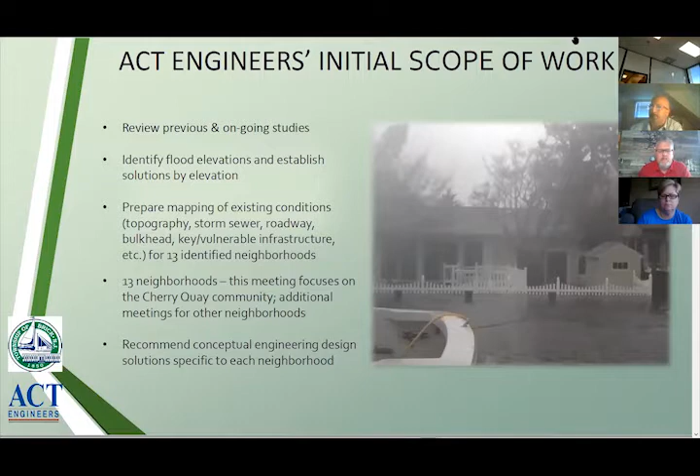And as you know, tonight we're focusing on the Cherry Quay area of the township. So on this next slide, on the left-hand side is the list of the 13 study areas that we have been focusing on. And on the right-hand side is a picture, you will see the areas specifically identified for the study. And now I'm going to turn it over to Jeff.

And as was indicated early on, Jeff is going to be giving you a lot of information, a lot of statistics. And if you have a question, don't hesitate to interrupt him and ask him because he's really good at explanations. So Jeff, it's your turn.

Thanks, Carol. As Carol indicated, this slide shows the 13 study areas listed on the left-hand side of the slide. You'll notice the Cherry Quay is number 5. On the right-hand side, you'll see an aerial map of Brick Township with the study areas highlighted in yellow with a blue number next to it. So you can find Cherry Quay is over to the center left. You'll see Cherry Quay outlined in yellow there.

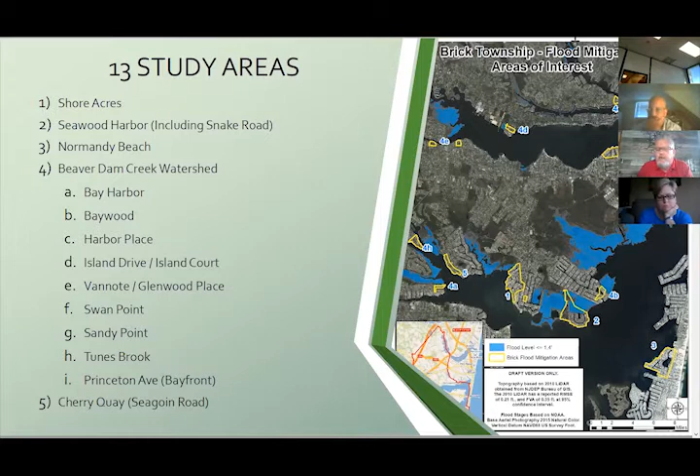The blue areas represent the low-lying areas that are inundated with flood waters even during a minor flood event. Let's go to the next slide. This slide is 2 representations of the Mantoloking tide gauge. They're both taken from the same tide gauge.

The reason we wanted to show this is that there's 2 sources of information that neighbors and engineers look up data for flooding or for the tides in the Barnegat Bay and in Brick Township. One is the Stevens Institute of Technology, which is on the left, and the one on the right is from the National Weather Service. Now, this is important. Another reason we have this is I want to explain the datum, which is the vertical datum that's used by the Stevens Institute. You'll see it references NAVD 88.

That datum means the vertical datum that's used to establish elevations. Now, NAVD 88 is the datum that we're going to be using in the slides that follow. Everything we reference as far as elevation is going to be referred to NAVD 88. Now, the reason NAVD 88 is important is because that's the survey datum that surveyors use to collect topographic information. They use that datum when they're staking out improvements, whether it be roads, homes, storm sewer systems, etc.

Everything nowadays is referenced to NAVD 88 datum so that everything is consistent. So that's the datum that we're going to be using going forward. You'll notice on the National Weather Service that there's a difference of 0.4 feet. So you've got to be careful when you look up the floods or the tidal ranges to see what datum you're on. If you're using the Weather Service datum, you need to subtract 0.4 to get to the NAVD 88. Okay, next slide.

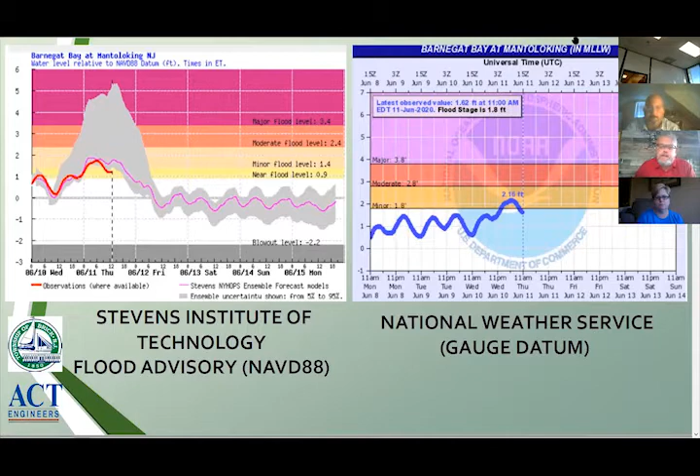This slide is a graphic representation that shows the various tide elevations in Barnegat. You'll notice the mean high water elevation, MHW, is 1.09 feet, and the mean higher high water elevation is 1.33 feet. That's represented by the MHHW. For Cherry Quay, the red line represents the lowest road elevation, which is located at one of the storm sewer structures along the roadway. So you'll notice that the lowest elevation is 1.82.

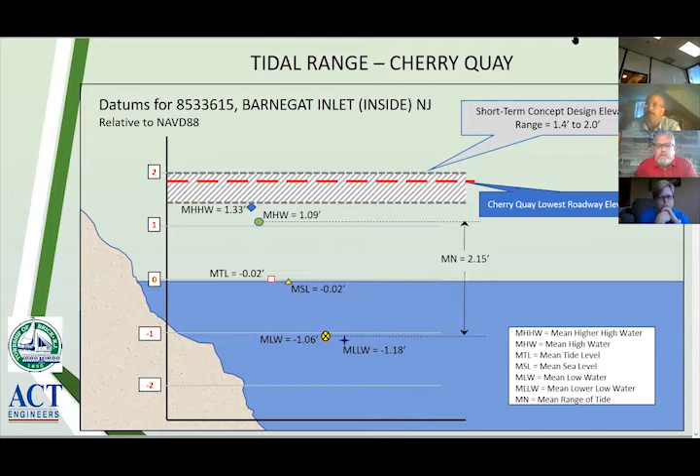And for this conceptual design for all 13 communities, we're looking at a conceptual design of between 1.4 to 2.0 as our target elevation. So you can see that getting to 2.0 from 1.8 is not very difficult. It doesn't create as many challenges as some of the other neighborhoods do. Okay, let's go to the next slide.

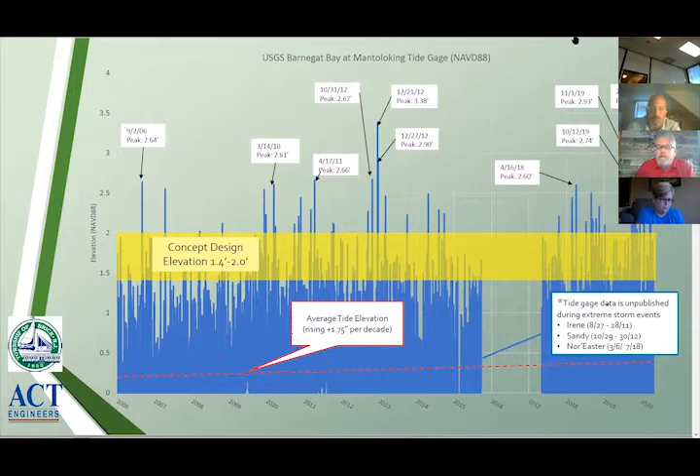Okay, this slide is again the Mantoloking tide gauge. And again, the elevations are on NAVD 88. Along the bottom is the years, and you'll see that it runs from 2006 to 2020. There is a gap in the data from the end of 2015 to the beginning or mid 2017. During this time, the gauge was not operational and data was not being put forward from the USGS. Up the left-hand side is the elevations. You can see it runs from 0 up to 4.

And all the blue up and downs represent the fluctuation in the tide. Obviously, the high tides are as it goes up, and then it comes down to the low tides. The low tides, in most cases, are below the 0 line, but that's less of a concern than the high tides. And you can see our concept design elevation of 1.4 to 2 is the yellow band that goes across the slide.

And why this is important is because you'll notice that the majority of the high tides are occurring below the elevation 2.0. There are several instances where you'll note that the tide did peak higher than that. In fact, on the center of the page at the top, 12/21/12, it peaked at 3.38, which is almost 3.4, which I'll explain what that means later.

But you can see that there's very few instances over the course of that time where the tide peaks higher than that. Now, I will note that this tide gauge information does not include severe storms like Superstorm Sandy or any of the hurricanes. The data that's collected during those events is not reliable because it exceeds the range of the gauge. So the USGS does not post that data in the tide gauge records here.

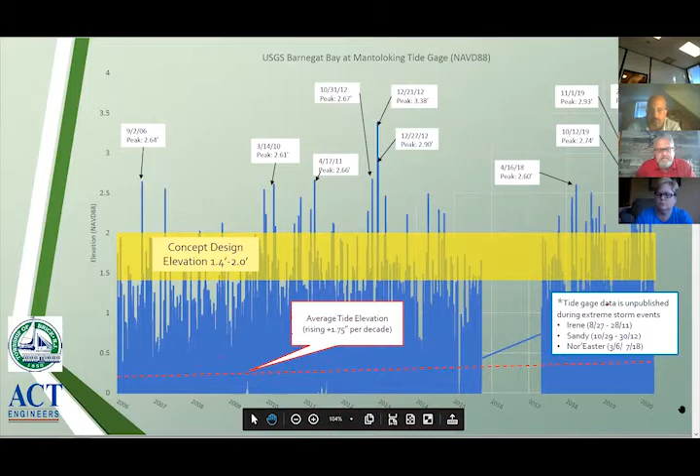Okay, the next slide. Janetta? Okay.

And this slide, we're showing the community flooding impact assessment. Now, the thing we looked at here, you'll notice on both charts, on the right-hand side of the chart, there's numbers. And at the head of that column, it says number of dwellings with compromised access. So you say, what is compromised access? We considered compromised access to be if the properties had frontage on flooded roads or needed to travel through a flooded section of road to get out. So if you lived in an upland area that doesn't flood, but there's only one road out for you to get out of the area that's flooded, then you're considered compromised access.

So the chart on the left was our short-term design approaches. And this was properties that were impacted to less than or equal to a 2 foot flood elevation. And you'll see that Cherry Quay has 2 dwellings with compromised access when the tidal waters get to an elevation of 2. On the right-hand side is our impacted greater than 2 foot to 3.4 flood elevation. And you'll see the 3.4 flood elevation map in just a little bit. But this represents the long-term design approaches. And in this, Cherry Quay has 23 dwellings with compromised access during that particular flooding event.

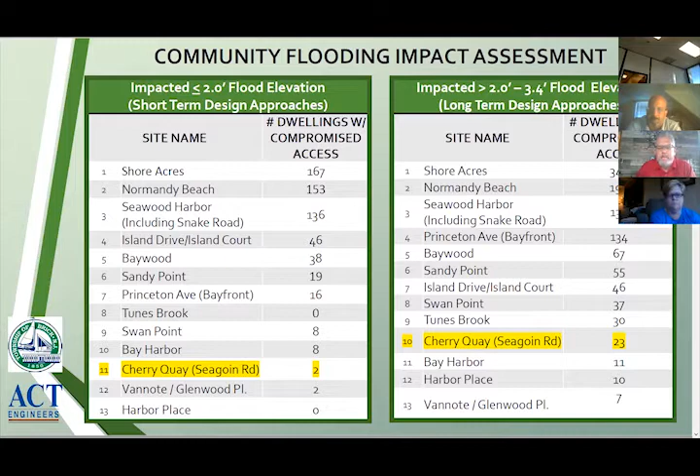Okay, next slide. Okay, this slide shows an aerial view of the Cherry Quay area. You'll notice a little bit of blue up at the top left and spattered throughout the area. The blue represents a flood elevation of 2.0. And if you remember, that goes back to the yellow band. The top elevation of that yellow band was an elevation of 2.

The orange reddish areas are inlet structures and outfalls to the bay area. And the numbers represent the elevation at the inlet castings, the inlet structures. So you can see a lot of them are above 2. You've got the one at 1.88, but you've got some in the 2s and 3s and all the way up to 5 when you get up towards Starboard Road. Okay, next slide.

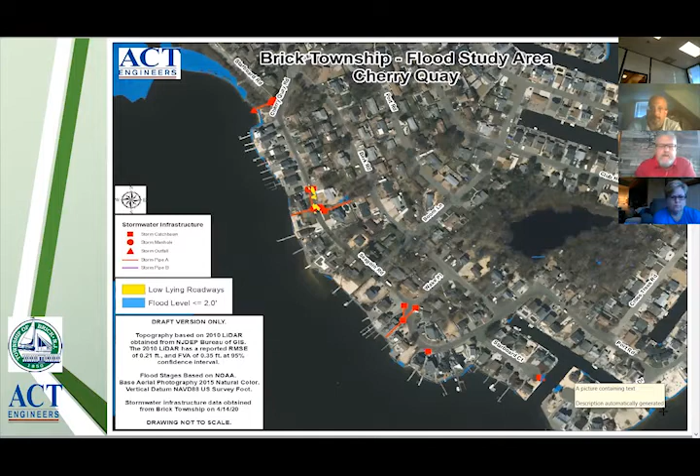Now this slide shows basically the same thing. The only difference is the yellow represents the low-lying roadways that would be below an elevation of 2. Now this is based on current available LiDAR data, which is topographic information. It's from an aerial. So those are the low-lying areas that would collect water at an elevation of 2.0. Okay, next slide.

Going back to when I mentioned the 3.4, that we would come back to that elevation. The blue now represents the inundation that would occur at a 3.4 foot flood event. And as you can see, there are significantly more roadways and properties that are impacted during this type of an event, though this event occurs on a less frequent basis. Okay, next slide.

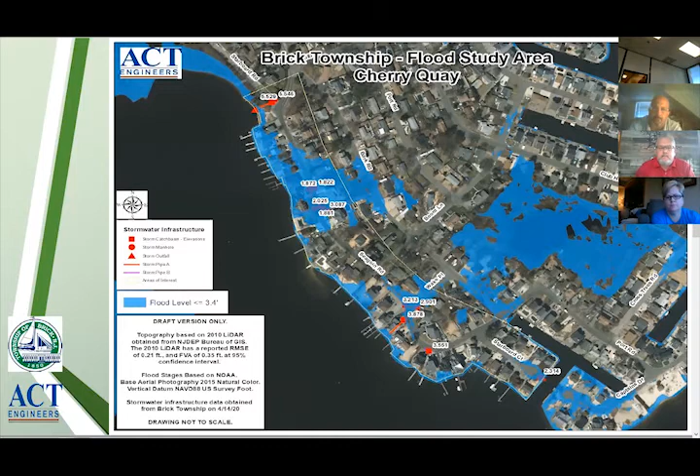And based on tide gauge information, this flooding occurs 60 plus or minus hours per year, which is significantly less than the short term. To address these types of flooding events, it would require, again, the installation of check valves, potential raising of roads, driveways, and properties to blend into the new roadway elevation, raising of bulkheads, and potentially pump stations, depending upon the total amount, which would really depend on the final design of the solution for long-term mitigation.

Now, the orange would be the elevated roadway, curbing, sidewalk, and property grading. And you can see how in concept you're able to get less water in the gutter and potentially eliminate all the water altogether. What this type of mitigation does is it improves vehicular access during normal tide events so that you can get in and out of your property to safe ground if necessary. This solution may require driveways, sidewalks, and yard improvements to blend the property into the new roadway elevation.

There are also stormwater impacts and mitigation, which would have to be addressed during final design based upon more exacting data for the neighborhoods that are being designed. And these solutions would need buy-in from the neighborhood, because there would be potential work on private properties to blend the grades so that water doesn't get backed up onto the properties and is able to flow to the street and the storm sewer system.

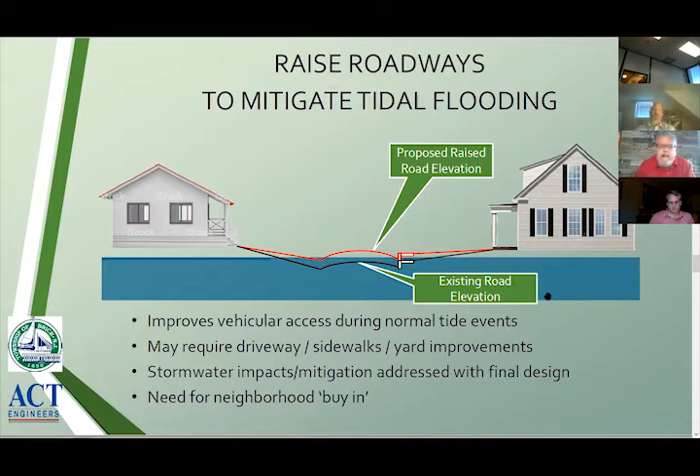Okay, next slide. This slide shows graphic representations of what raising the roads might look like. So on the left, the red line would indicate the raising of the road. The top of the arch would be the new road elevation, and the bottom flat red line would be your existing road grade.

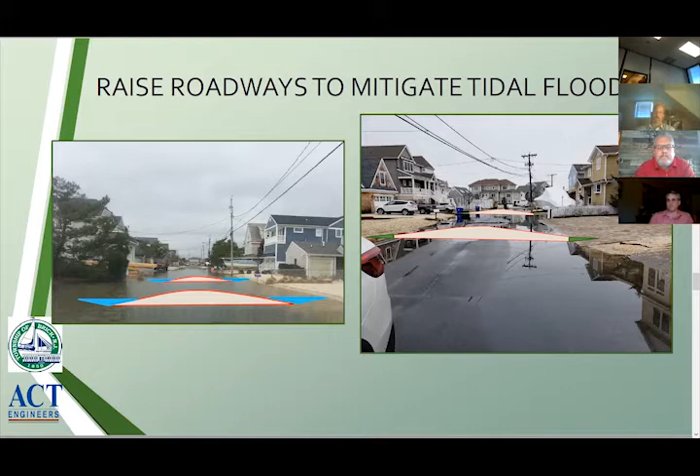The check valve will let the flow go back into the bay side. However, when the tide starts to rise again, the valve's going to shut. Whatever water's in the system is going to stay in the system until the tide goes back down, or the waters on the upstream side have a higher height, if you will, than the bay, so that it can force the water back out into the bay.

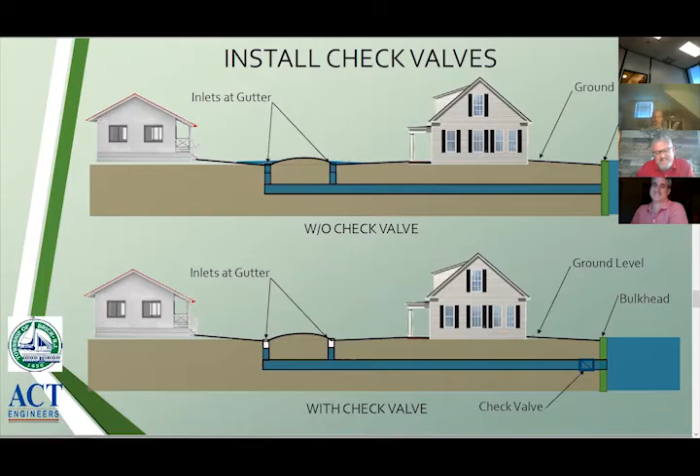Okay, next slide. Sorry, Jeff, you're freezing up every time you say next slide. Okay. And there's a little bit of a delay. All right, that's all right. Sorry. No problem.

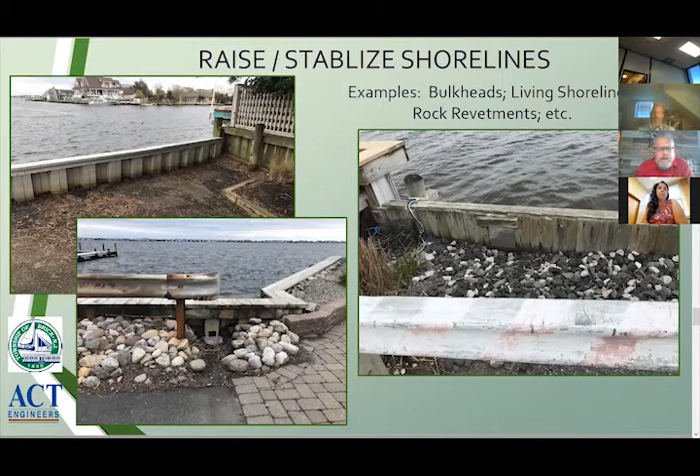Okay, back to Carol. Thank you, Jeff. So next steps moving forward, we're going to be updating the topographic mapping in specific areas as we move towards the engineering design, where the township and ACT will continue to identify and pursue funding sources such as those from the United States Army Corps of Engineers, FEMA, New Jersey Office of Emergency Management, NJDOT and their local aid programs, as well as other potential funding sources.

And we're going to work with the township to identify and recommend revisions for future design standards for township ordinances, and work with Brick Township in developing strategies, allocating funding, and moving to implement, which leads to final design, obtaining the necessary permits, and then going on to construction to relieve the flooding in the areas designated. So that's really all that we have now before questions.

And I want to apologize because when I talk, my mouth actually does move. So I'm going to give it back to you, Joanne, for questions and discussion. Well, I think the mayor wants to give an update to the residents on the call too. Great.

Yeah, so from a township perspective, who's here is Joanne Bergens, our business administrator. Our township engineer is here as well, Alyssa Cummins, and two of our councilmen, Councilman Art Halloran and Councilman Vince Minichino, are all here. So if you have questions for the township, hopefully one of us can answer those, or for ACT engineers who just gave the presentation, you can ask those questions as well. But just to give you an update as far as funding for things like this, we have been funding along the way, including recently.

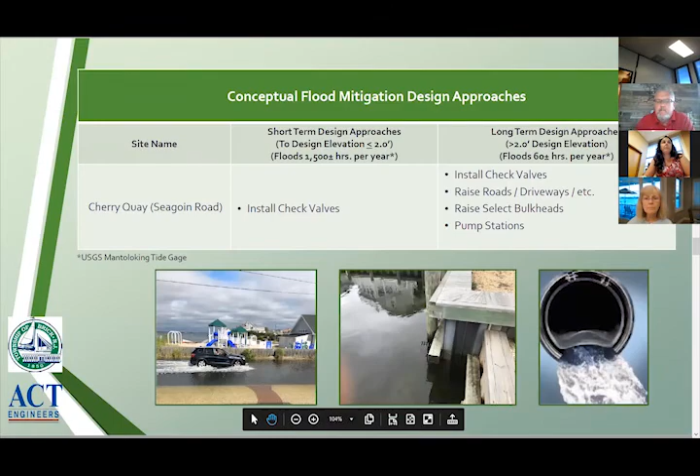There's other neighborhoods. Can you put that map up which shows Seagoin Road on the yellow and the red and all that? Janetta, can you do that for us? Yeah, she's getting it. The one with the yellow, Jeanette? Next one. There you go. Oh, thank you for that. So I had the one on before because it has the elevations. Okay. Why don't you click back to that one real quick?

So you can see where the yellow is, and then you can see the elevations there. You got 1.87 and a 1.88 and a 1.82. So that area is under 2. Thank you. I just wanted to see that again. I appreciate it. Okay. Does that answer your question? Yes, I missed that, and I just wanted to see that again.

And so my other question is for the mayor. Mayor, I know this is a very big question, and you did address this. Do you have any specifics regarding time frame, specifically on the check valve installation? Well, we have ordered the first set of check valves, and I don't have that list with me. Melissa, do you have that list of Seagoin? Can you hear me? Yes, we can now. Okay.

So we are out to bid for the check valves right now. I believe we're on the street as of today, and the bid opening is scheduled for July 1st. Once we open that, we can award the contract and start purchasing the check valves. There are 2 locations on Seagoin Road that are on the list. And then I had been in contact with Chuck Camella to talk about some other areas in the neighborhood on Thursday or Friday.